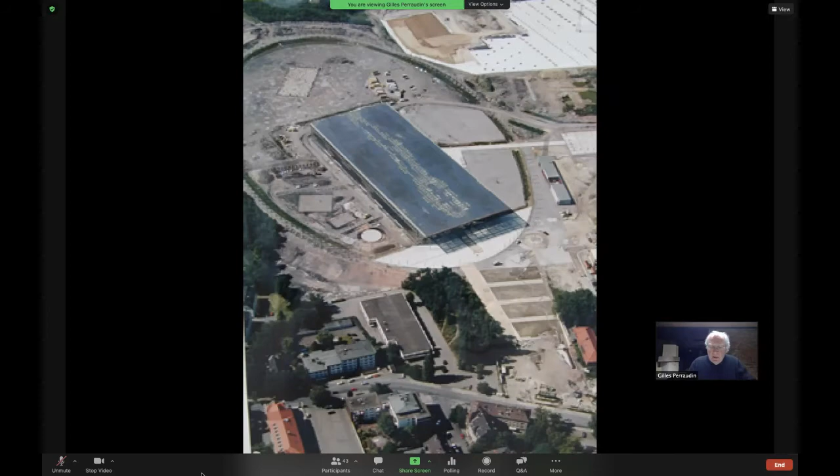In 1995, I started the construction of an important building in the Ruhr area of Germany, in the town of Herne. Coming from the first 15 years of my professional practice, it testifies to the culmination of research devoted to imagining architectures that respect the environment and best preserve our living conditions on Earth.

Built in wood from the nearby forest and covered by photovoltaic cells that produce electricity not only for itself but also for the newly built neighborhood, it has become a possible model of a response to the environmental challenges of the future.

Its double envelope constitutes the development of an architectural concept imagined from the start of my career, a concept that I call the microclimatic envelope, which consists of protecting the main spaces with a second envelope which protects them from climatic variations. Doubly protected, studies have shown a significant reduction in energy consumption, and it also provides generous convivial spaces.

This building of the Académie de Mont-Cenis, as I said, is not only fully self-sufficient, but it is also a producer of energy that benefits the new districts built around it.

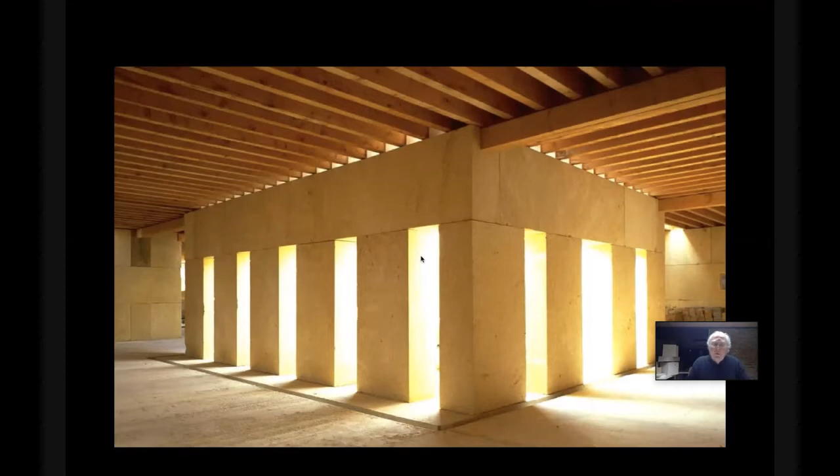The assembly of stone modules of 2 meters by 1 meter by half a meter, all identical and able to take only 2 positions, one vertical and one horizontal, excluding cantilevers, put me on the path of an architectural response of great sobriety. I then discovered a French literary movement called the Oulipo. This literary movement imposes very strict written rules, such as those used, for example, for poems or Japanese haiku. Imposed rules free the creator from his own psyche.

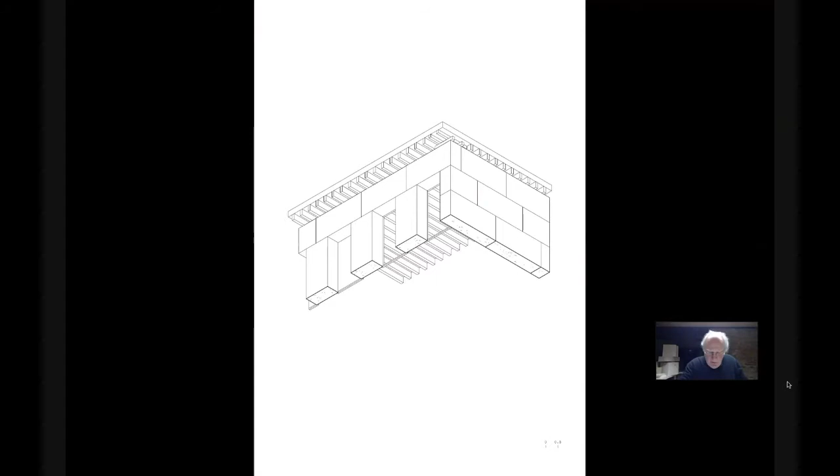Since the architectural form is imposed on me, I no longer have the anxiety of having to invent forms. This set me on the path of a discovery of fundamental qualities of architecture, which are rhythm, proportion, light, materials. Luckily, immediately after this crucial experience, I was commissioned to build a teaching college on the outskirts of Nîmes, a city founded by the Romans and close to the Pont du Gard quarries.

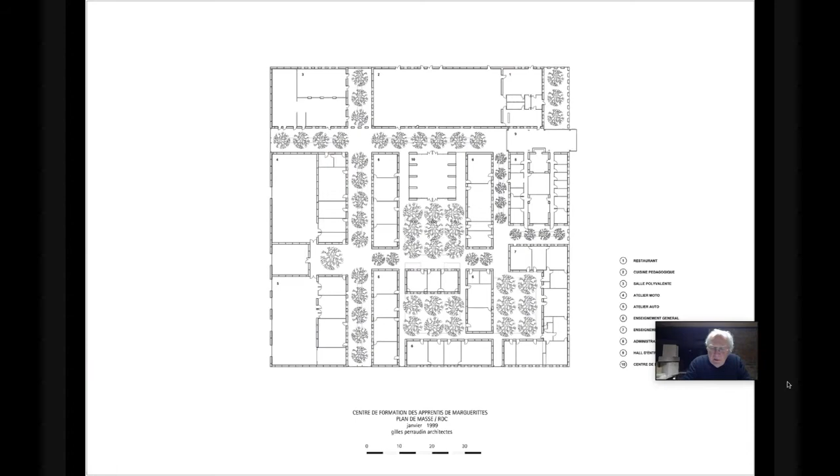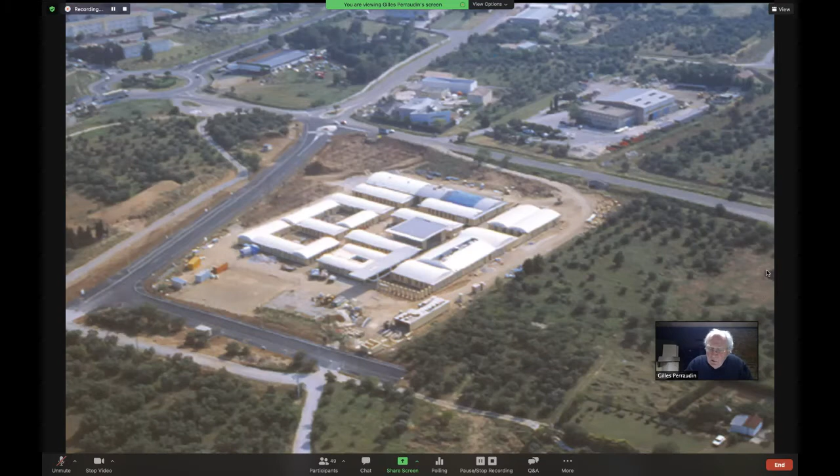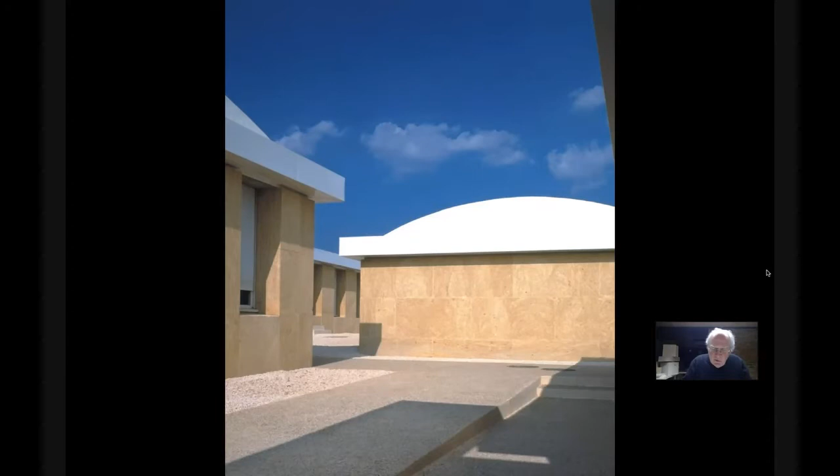Inspired by the construction of my winery, the project is a series of massive stone buildings with 50-centimeter-thick walls, single level, set in the middle of an old olive grove. The roof has a single span, vaulted to promote the effect of air stratification in a hot country. These constructions are arranged to break the north wind, the Mistral, and create courtyards and passages in the shade. This building is inspired by the Roman camps with cardo and decumanus, as much as a Chartreuse, which is a series of buildings assembled in a demarcated enclosure.

It was the opportunity to supplement my experience and my analysis on the interests and advantages of stone construction. First of all, it's speed. I always like to remember that this construction was ahead of the construction schedule for the first and the last time in my career. The assembly of stones, which can easily resemble prefabricated concrete blocks, is very quick. It is all the more so as the stone, once laid, gives an aspect of great beauty and avoids the additional cost of a coating on its surface.

These coatings, with limited constructive qualities, often lead architects to a purely aesthetic expression of their work. Numerous contemporary examples bear witness to this outrageous aestheticization of architecture. I believe that this aestheticization, challenging architects to invent every day a more spectacular work than the day before, has made architects simple producers of images to the detriment of their role as builders.

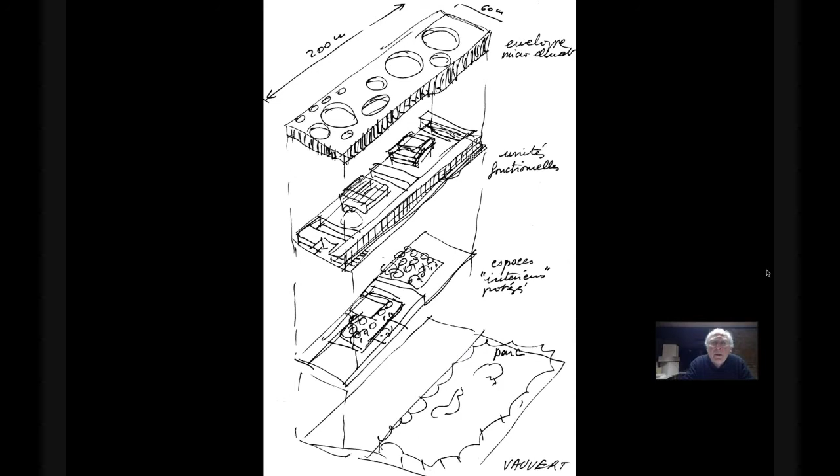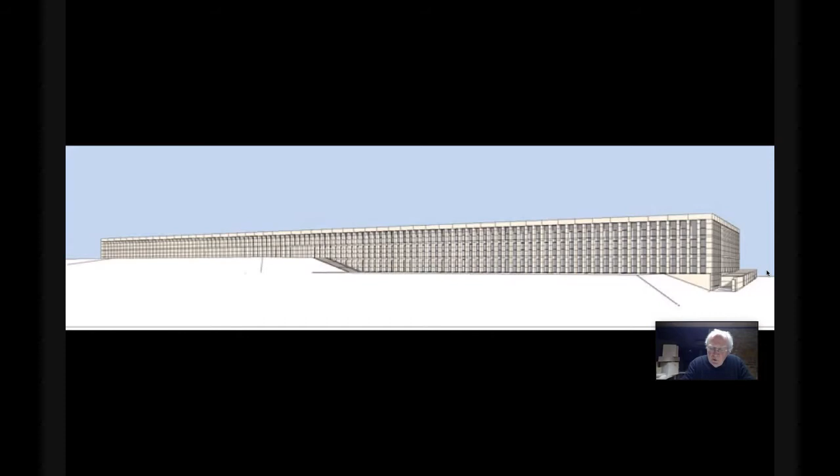The building, aligned along a new track, is a quadrangle 200 meters long and 60 meters wide. The various elements of the program are arranged by their use under a single roof pierced with openings defining the free spaces of the interior courtyard. Facing the plain that it dominates, the long facade defines a simple rhythm harmonized with the large openings of the roof. This project is a variation of the concept of a microclimatic envelope but adapted to southern Europe. The roof creates shade by controlling the sun and protecting intermediate spaces from the wind.

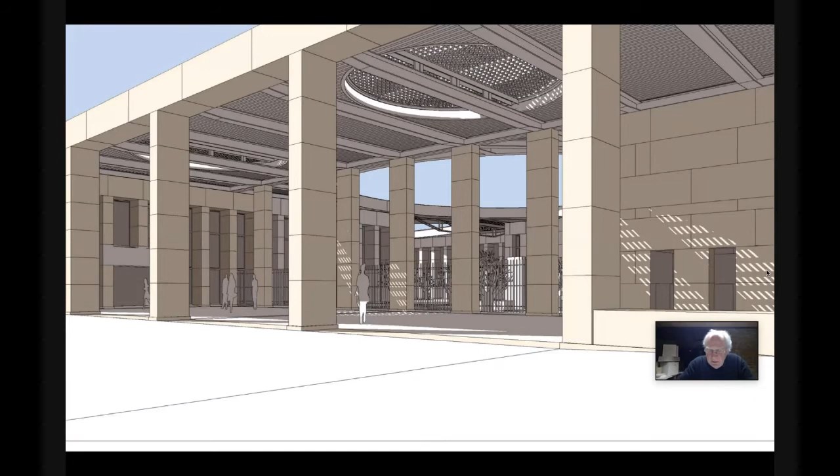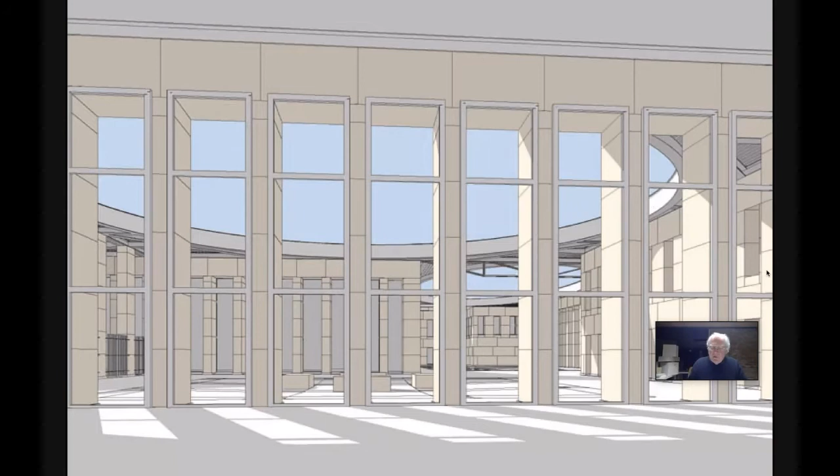But it was a disaster. While we had completed all the studies and the construction was ready to start, the client, under pressure from local politicians and traditional concrete companies, worked to prevent the realization. It is not easy to clash head-on with the existing economic system. If there is room for some marginal operations, the system will do everything to prevent a challenge to its hegemony. So far, no operation of this magnitude has seen the light of day.

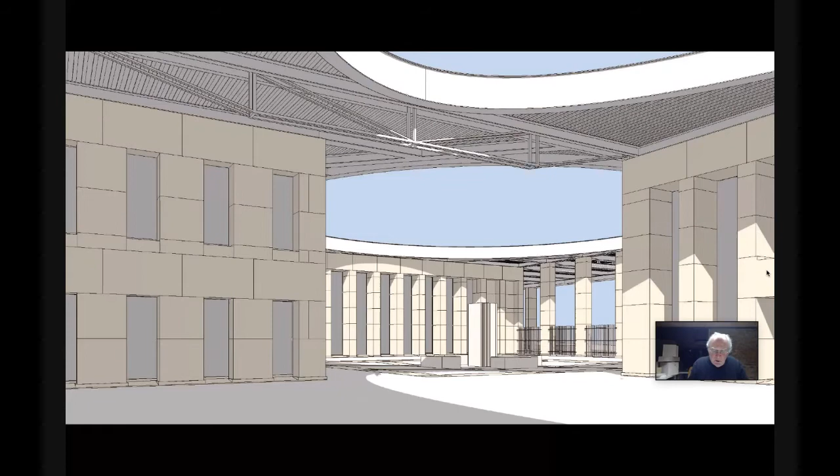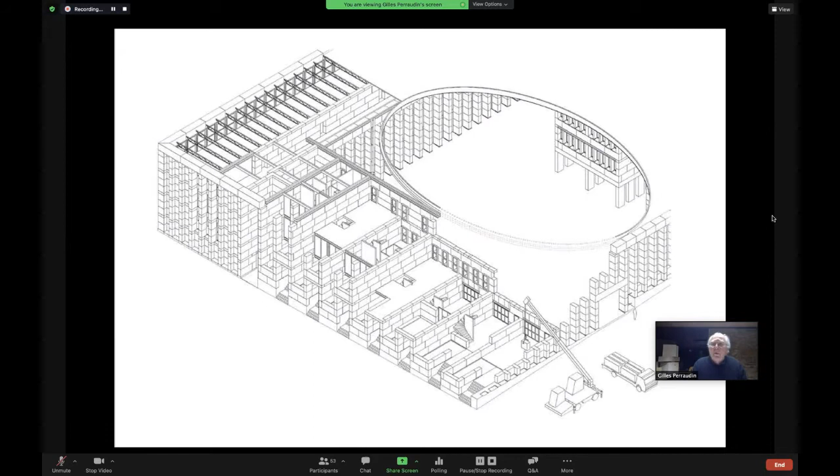This hegemony is expressed in different ways, in particular at the level of building standards and regulations. These rules discriminate against constructions that offer solutions based on natural materials, also in terms of seismic rules or fire. I remember we discussed it with Aminta in London recently. It is the industrial firms that finance the regulations. The stone industry is poor. It is not able to lay down construction rules following research processes imposed by the firms themselves. Thus stone, which has for it the advantage of a few millennia of construction, has no standard adapted to the contemporary world of construction.

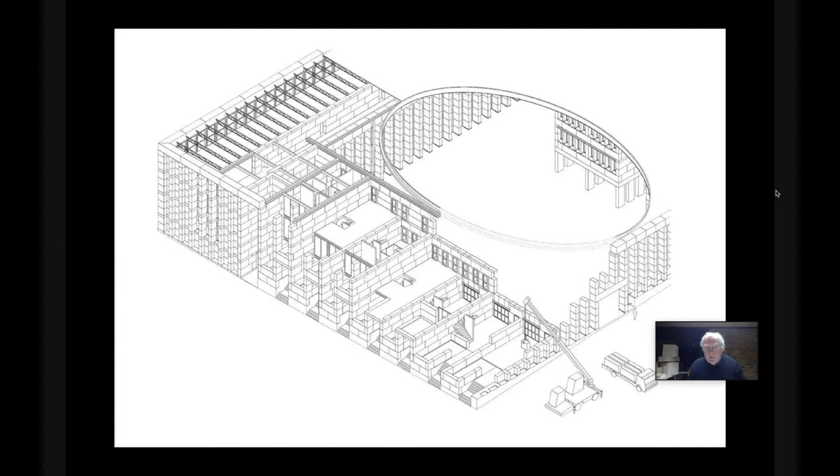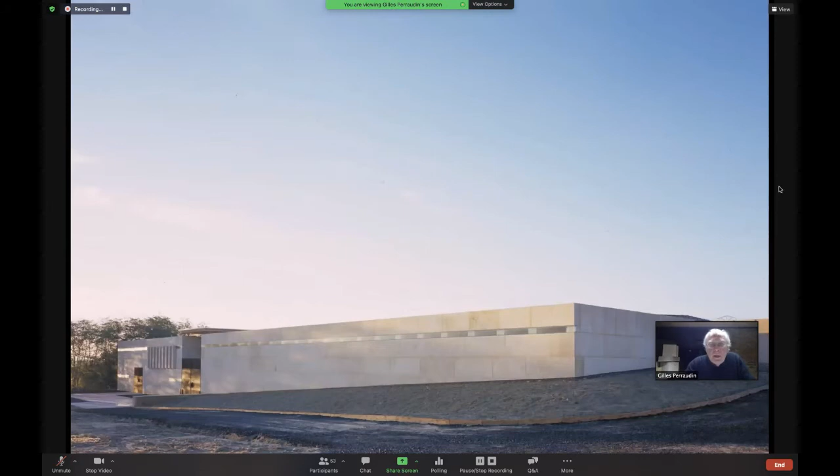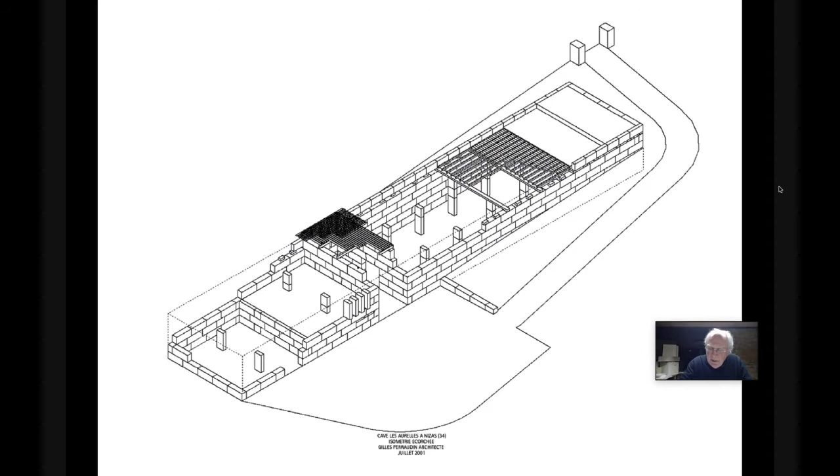We will see in a recent project that we have succeeded in countering these standards, and for decades we have been fighting the perverse effects they have on stone construction. This project was a massive blow with disastrous consequences for my professional future. That's why I was happy to welcome a small wine cellar project. The client wanted to build a massive stone part to hide a large metal shed. We convinced him to do the whole thing in stone. That's what we did, with the same budget as a metal shed and with infinitely more quality.

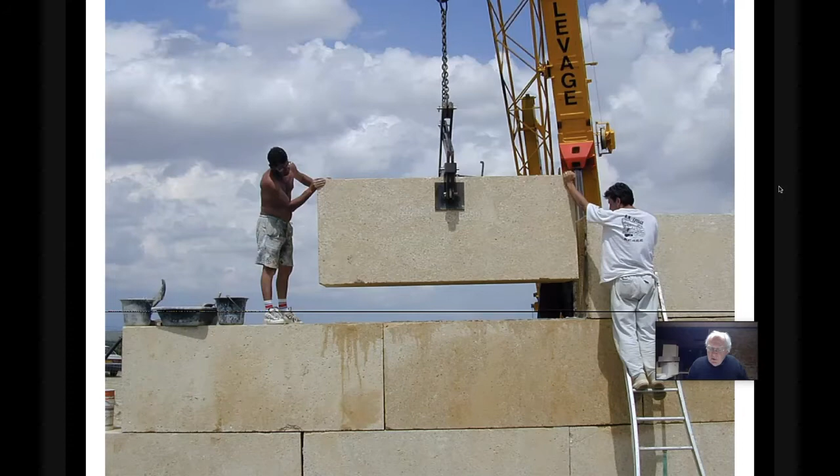With 65 centimeter thick walls and a planted roof, thermal inertia is ideal. It's a cellar and it's ideal for the wine. You have to understand the construction process, which is very economical. The quarryman extracts stone blocks adapted to the tools they have. These blocks are simply cut in half by large saws, then they are mounted quickly by traditional lifting devices. Simply laid with a lime mortar joint to ensure air and water tightness, the construction is a simple operation. No steel or concrete reinforcement.

As expressed before, the construction imposes a sober writing. A wine cellar is like a chapel, especially in France, with a central nave and side aisles, as you can see in the picture. The light proportions result from the frugality of the construction. The consequences of the use of stone on my architectural style will become more and more significant. The construction of a new wine cellar would provide me the opportunity. The circumstances of this project would allow us to reach an increasingly mystical dimension of architectural approach.

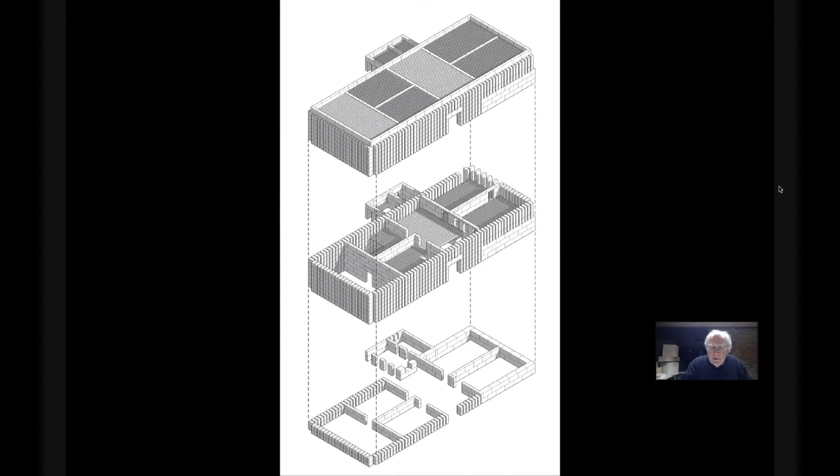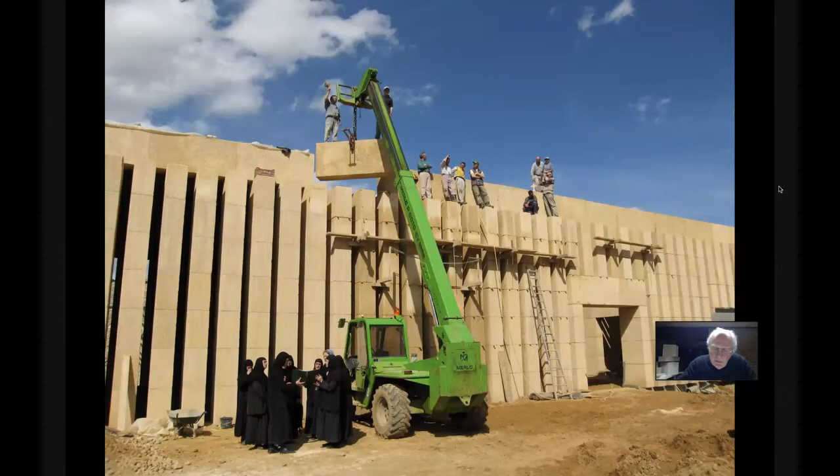A religious community of Orthodox nuns living in the south of France from vineyards came to see me for the construction of their new winery adjoining the renovated farm in which they lived. Followers of agroecology and guided by Pierre Rabhi, a famous French peasant philosopher, they embodied a radical attitude for the societal future of a world altered by unbridled consumerism. With few resources, we decided to build in self-construction.

I must tell you my admiration for traditional vernacular architecture. These architectures are for me the example of the splendor of architecture subject to strict rules of economy of means. Men built for their bare need without speculating on the market value of their property.

Without preparation and without makeup, these frugal constructions of great sobriety of expression are sensual splendors. I ended up concluding that beauty can only be born under the most extreme economic conditions. This building I show you now is a double square in plan. Didn't Louis Kahn start all his projects by drawing a square?

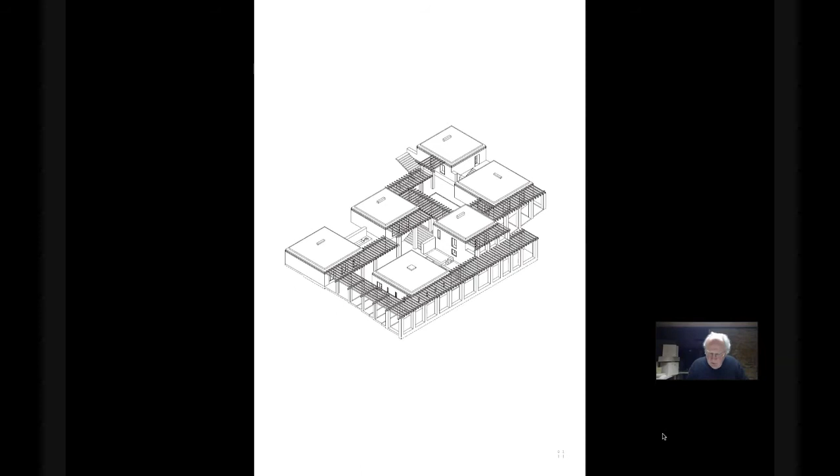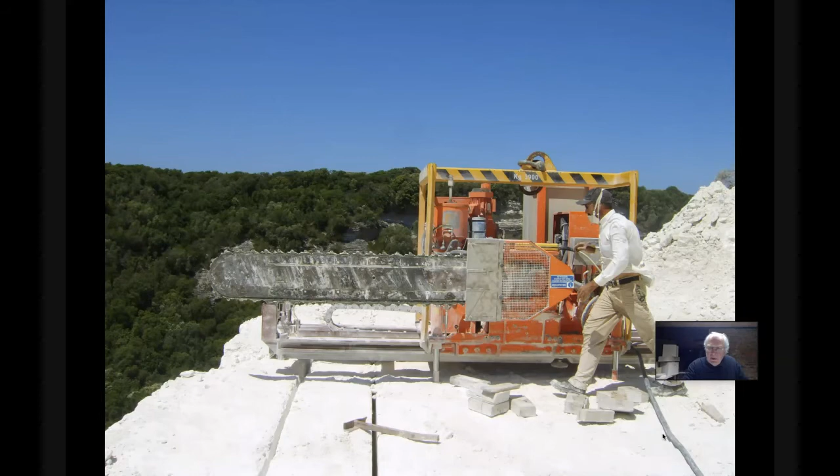I have brought together in a book, Building in Massive Stone Today, all the operations involved in the construction of the Patrimonio Wine Museum. I think that you can find it in a good library. It's Building in Massive Stone Today. The walls are 60 centimeters thick.

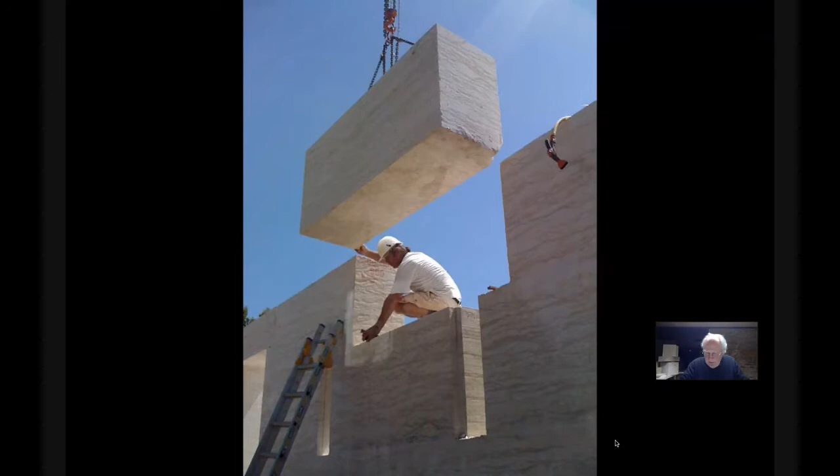The roof is in wood, Corsican, we call it Laricio pine, it's a Corsican pine, insulated with wool, and covered with earth. The joinery is made of chestnut trees, endemic to the island. No thermal insulation on the walls to preserve the advantage of the high inertia of the stone.

The outdoor spaces equipped with vegetated pergolas and ponds produce a protective microclimate. These are the traditional devices of Mediterranean architecture. We have the feeling of walking in a place that seems to come from 1,000 or 2,000 years past, but yet very contemporary. A place, however, indifferent to modernity.

Stone is already made in the billions of years of the creation of the planet. Extracted simply by sawing, the stones are then cut, transported by trucks, numbered according to a precise layout. The stones are mounted quickly with a small mobile construction machine. In the end, the stone has an extremely low carbon footprint, in the order of 4 kilos per ton.

At the start of the studies, we had to build earthen buildings. There are some earthen constructions built in Corsica. They were inspired by Hassan Fathy, who came to give a seminar in Corsica at the request of some fanatics of his work. We must pay homage here to the great Egyptian master because he illustrates the courage and conviction of an architect who knew how to fight modernity, to reconnect with the millennium and reconnect people with their identity.

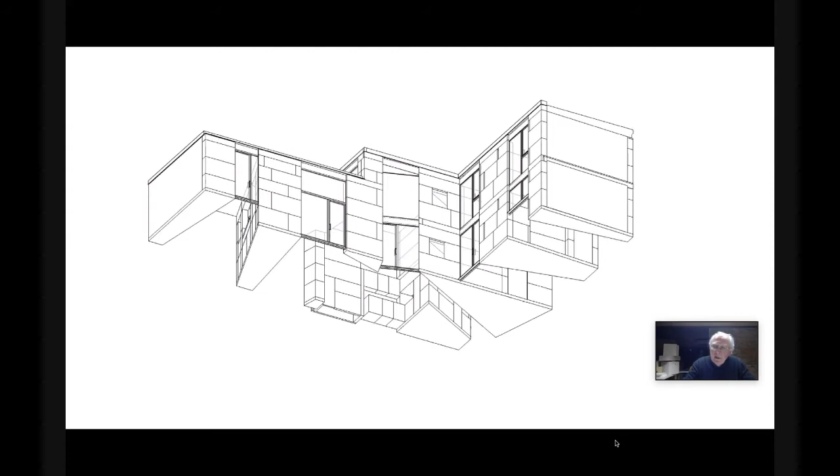This house project, in a very dense urban context, will give us the opportunity to prove that stone is a material adapted to the most complex conditions. The small plot we had is completely enclosed in the middle of other buildings in the historic district of Lyon. The project makes the most of the regulatory possibilities for construction. Heights and widths are strictly regulated.

A single opening gives us access to the construction site. To overcome the shallow construction depth, the serving spaces, bathroom, laundry room, pantry, and so on, are perpendicular to the facades. In the voids resulting from their position are the living spaces.

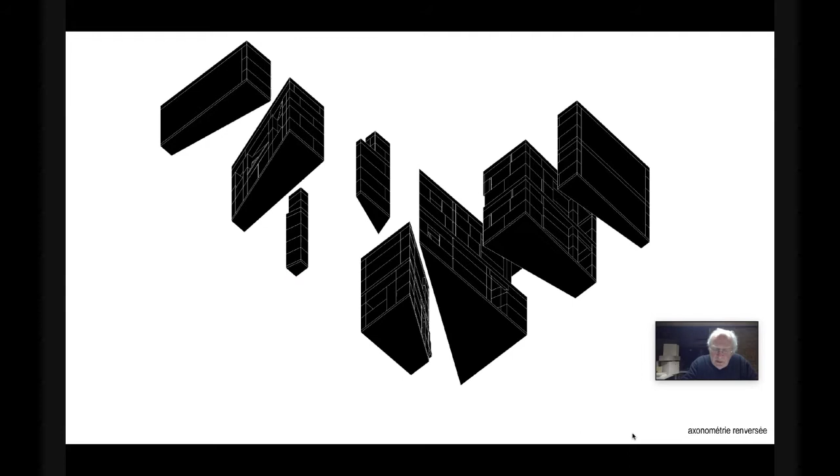Yes, you can see in the picture, these are the supports which contain the serving spaces. The serving blocks become the supports to the floor and the roof. We enter them, cross them, and the house becomes a walk in a stone landscape. A skillful and complex assemblage of stone.

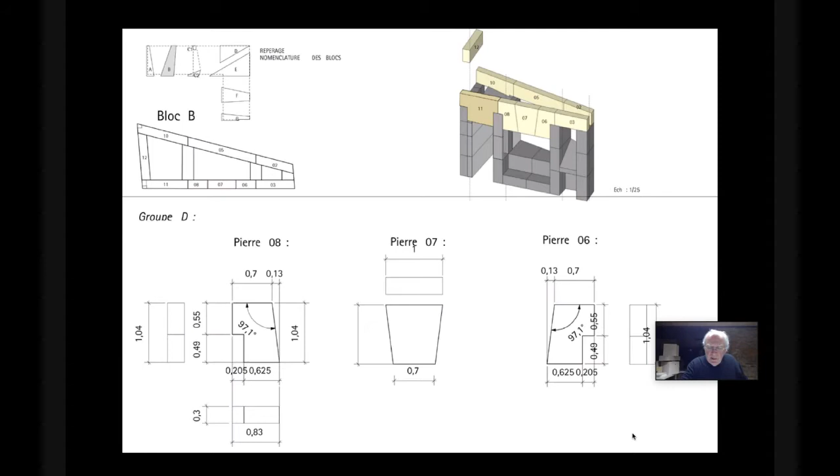Yes, a feeling of being in a medieval construction. It is a tribute to Louis Kahn, who was inspired by medieval construction in his work. The work required to define each stone is long but exciting. You can see it in this example, in this picture.

But this work has another virtue, that of redefining the relationship between architecture and engineering. Often architects leave it to engineers to define the construction of their work, which ends up escaping them. Faced with this disposition, the architects take refuge in a purely plastic work which distorts their art. No need for an engineer to define the structure. The simple laws of stability are sufficient to guarantee the work. The architect once again becomes the master of his work.

The art of architecture is the most difficult of arts. It is located on the borders of sculpture, painting, music, and subject to the laws of construction. But the art cannot be confused with any of the other artistic disciplines. It is a demanding discipline to be able to combine the satisfaction of basic needs in an artistic response. Few are those who succeed, and we can see how the architecture of the 20th century, depriving architects of the technical mastery of their discipline, locked them in a plastic or sculptural approach that will suffocate them. The stone can help save us.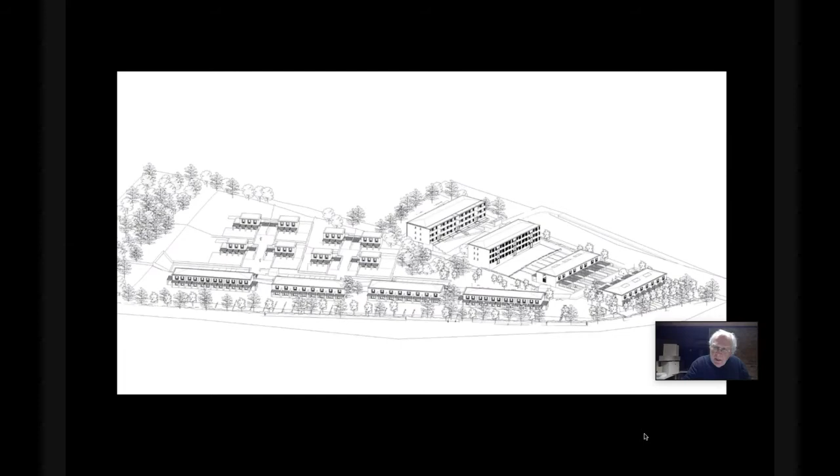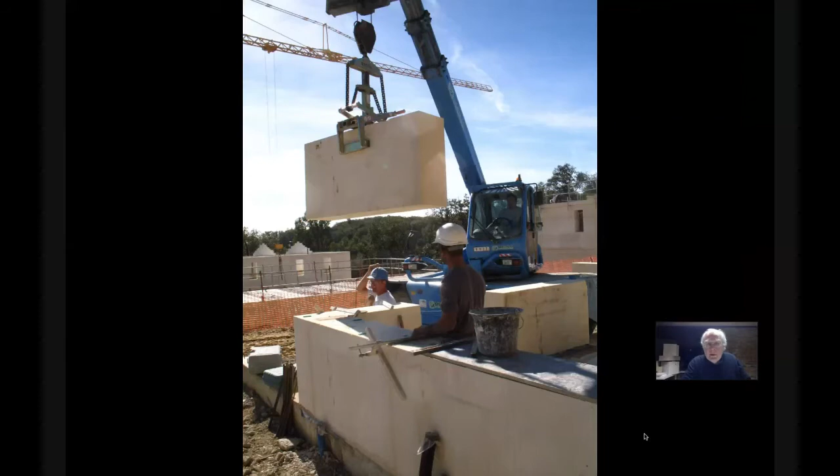All walls are 30 centimeters thick stone with no concrete or steel reinforcement. The joinery is made of larch, a wood that does not need chemical protective treatment. With the stone, which has no chemical treatment, the housing is very healthy. The accommodations are systematically crossing between north and south. To the south, a large terrace extends the interior space. Wooden shutters transform it into a protective space on summer days and winter nights. Stone provides a great deal of inertia, which cools homes in summer and retains heat in winter. The building is very compact, for a minimum of walls in contact with the outside.

The regulations require us to install insulation. Congratulations to the insulation manufacturers' lobby. The construction required more than 1,000 cubic meters of stone, yes. Only a few quarries in France are capable of meeting this challenge. The development of stone projects will allow the development of quarries to meet new demand. Let's not forget that after World War II, the reconstruction of France was done in stone, illustrated by the gigantic operation of the architect Fernand Pouillon in Marseille, Paris, and Algiers.

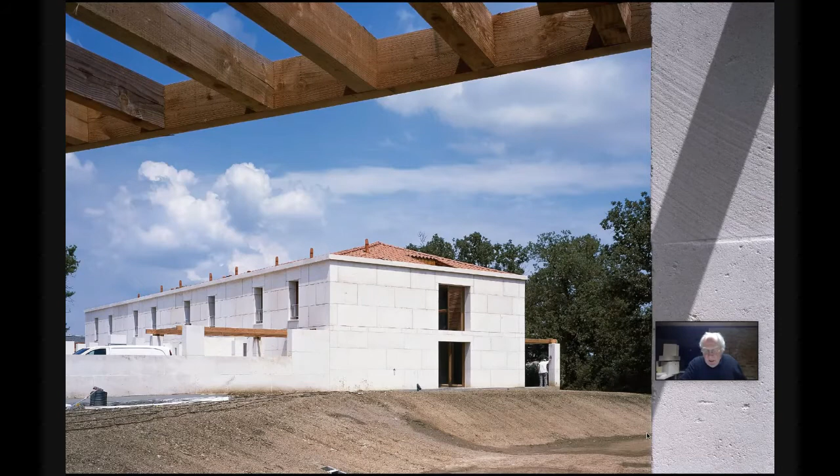Some environmentalists worry about the development of quarries which deplete resources. They may be reassured. Each construction is a new quarry. There are many historical examples of buildings that were dismantled and then reused. The stone cladding of the pyramids of Giza was used to build the palaces of Cairo. The dismantling of the Bastille during the French Revolution is reflected in the buildings of the district. And the architect reused Roman columns for the construction of St. Peter's Square. Stone is not recyclable, it is reused.

Recycling requires spending new energy. For example, aluminium requires as much energy for recycling as it does for manufacturing. For this reason, recycling, which is the good conscience of the industry, should be banned. The stone is indefinitely reusable because no energy is required for its reuse. You can change small pieces of degraded stone, which is impossible with reinforced concrete because the built skeleton is integral from the top to the bottom of the building.

Thanks to the large size of the elements, the assembly time is very fast and therefore very economical. We have adapted this size to contemporary lifting devices. We still have to make progress to find lifting means powered by renewable energies.

I would like to point out to you the construction of a contemporary building that does not use any fossil fuel, never for materials, nor for lifting equipment. It is an experiment, I have no picture, I'm sorry, carried out by archaeologists who decided to remake the castle of Guédelon in Burgundy, in France, in the style of construction of the time. This experience proves that we can build today without spending carbon.

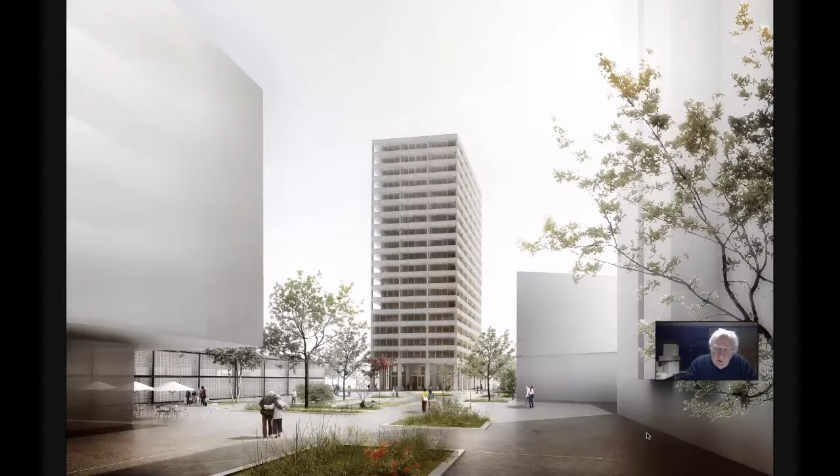This whole operation does not go beyond 3 levels. Would stone construction be limited in height, I was told? The following project will show us that we can make high-rise buildings in stone. The first, unfortunately not built, demonstration is that of a tower presented during a competition in the city of Geneva, made up of a superposition of shops, offices, and housing of 20 levels. The building is entirely in stone, a granite called gneiss, and climbs 65 meters in height. The inner bracing core is concrete.

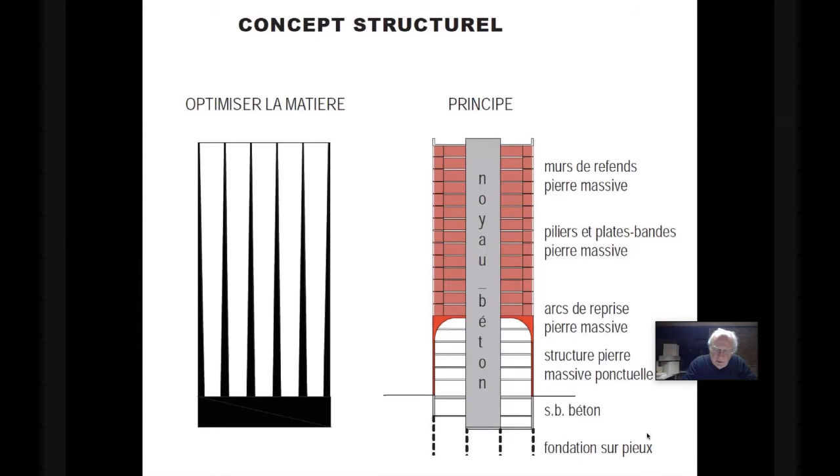Faced with the doubt that a listener of my conference expressed on the possibility that such a building could be built in Paris, I pointed out to him the already proven presence of 2 towers 65 meters high, at Notre-Dame de Paris. The two towers of Notre-Dame de Paris are 65 meters high. And I am sure London has monuments of this height.

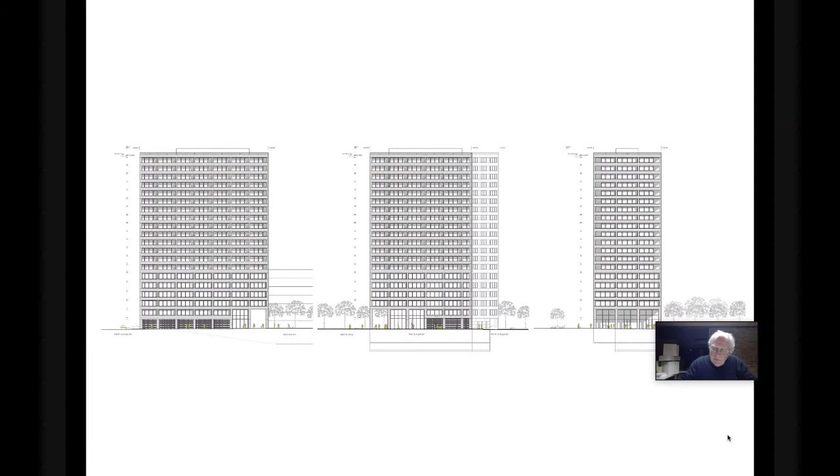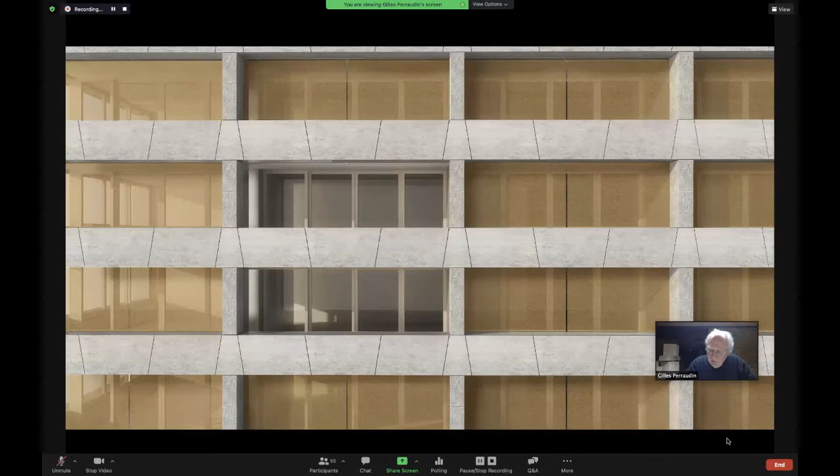One day, traveling in the south of England with Rice, he pointed out to me that it would be difficult to justify the stability of the church we were visiting for the lack of a suitable mathematical model. It was Peter who first put the idea of stone in my head and made it possible. He knew that the absence of rules would be a barrier to the use of stone. We need to motivate young engineers to rediscover these splendid materials.

But before showing you two projects of buildings of modest heights, I would like to bring up a subject that is close to my heart, the thermal insulation, and I will do it with a modest little house. It is a small single-family house built in the south of France, in the Rhone Valley. It is located in a residential area and on a small floodplain almost 1 story high. To find the best ratio between volume and living space, the house is on a square basis, always the square. Obeying strict geometric rules, division into 9 equal parts, the living spaces are distributed in an optimized manner.

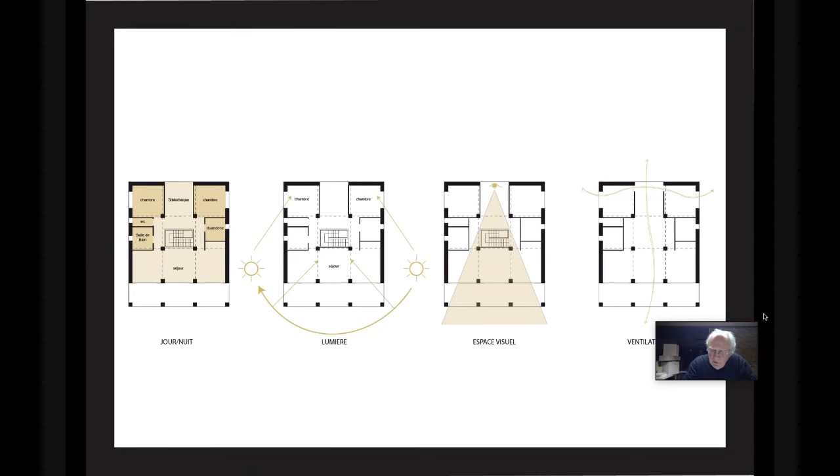With a large terrace to the south, in front of a large bay, capturing the generous winter sun and protected in summer by a vegetated pergola, the living room crosses the house to benefit from a bay to the north for full ventilation. 2 bedrooms and the services area occupy the east and west faces. The rooms are fitted with stone screens, which allow ventilation, protection from the sun and intrusion. These are the kind of drawings we did to manage the construction on site. Each stone is defined, and on the site it's only an assembly.

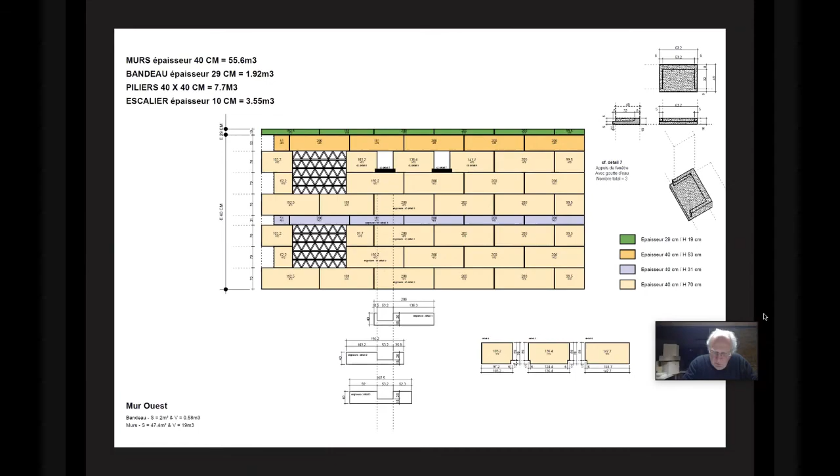Our architectural work focuses on eliminating all unnecessary formalism. It focuses only on the subjects of light, as I said before, proportion, rhythm, and matter. Matter, what do you want to be? The stone answers, I want to be a wall. These walls are 40 centimeters thick and have no insulation. The design of the house allows for this regulatory deviation. The rooms are not heated.

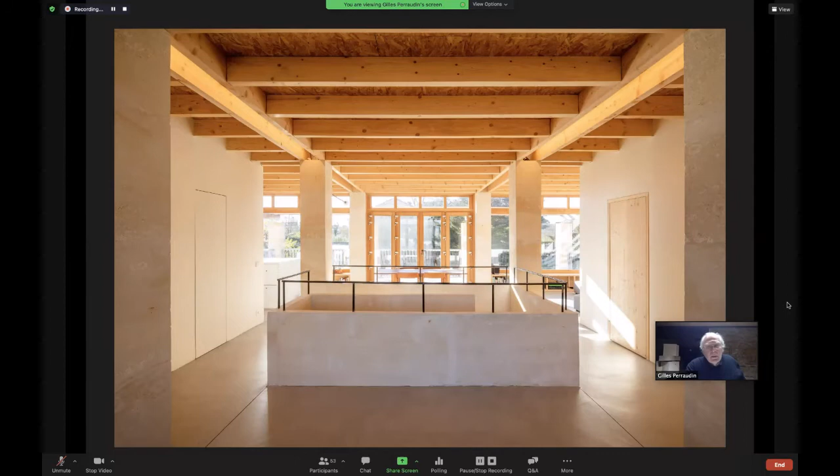The large north and south windows have double glazing, and the east and west walls are protected by the services areas. The insulation surface is very small. Only the roof and floors are insulated. In the context of global warming, summer comfort is more important than winter comfort. This is a picture of this very small house on a very low budget, made entirely in stone and wood. Thermal inertia must be privileged, and stone meets this objective perfectly.

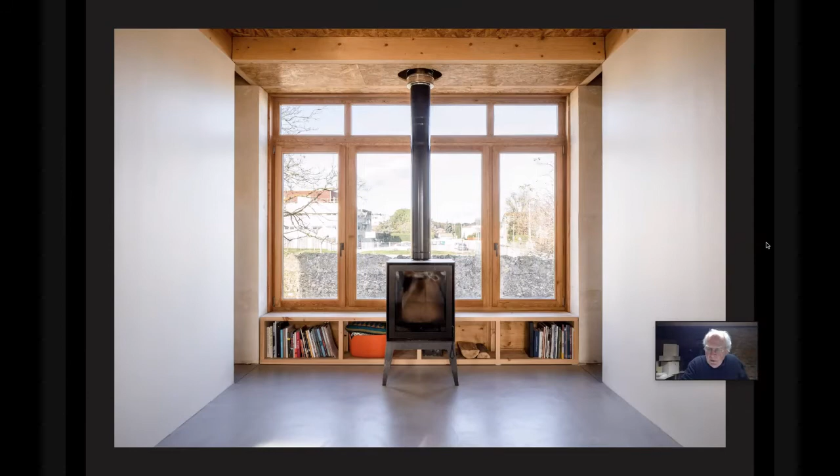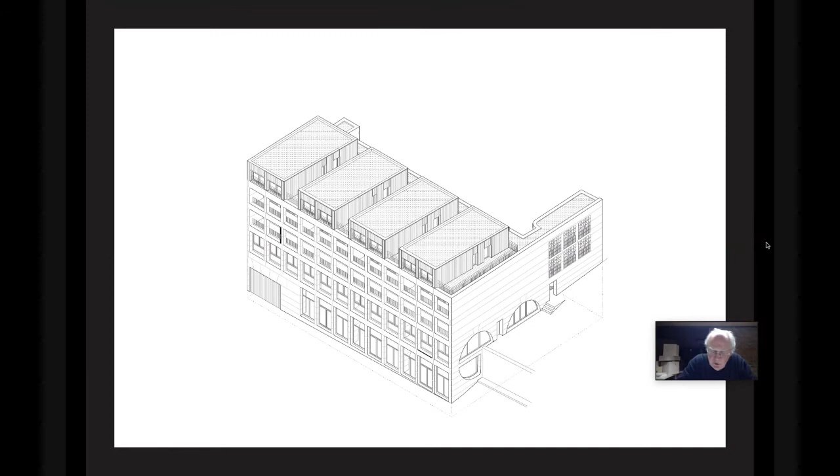I will end my presentation with 2 projects under construction. The first is in Lyon. The second is in Geneva, in Switzerland. Located on the banks of the Rhone in Lyon, opposite the large urban park of the Tête d'Or, the program called for the superimposition of functions, a return to principles of the city before the new towns which separate these functions in space.

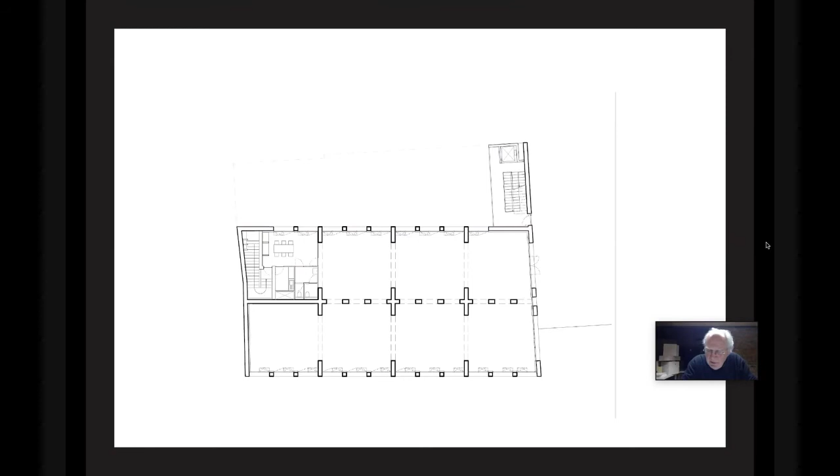A workshop on the ground floor, a carpentry fab lab, on the first level the offices, and finally 3 levels of accommodation, 2 of which are duplex on the roof. It is a modest project, but one that focuses a lot of response on the future of cities. If we want to reduce our carbon footprint, it is imperative to reduce urban travel by bringing home and the workplace closer together.

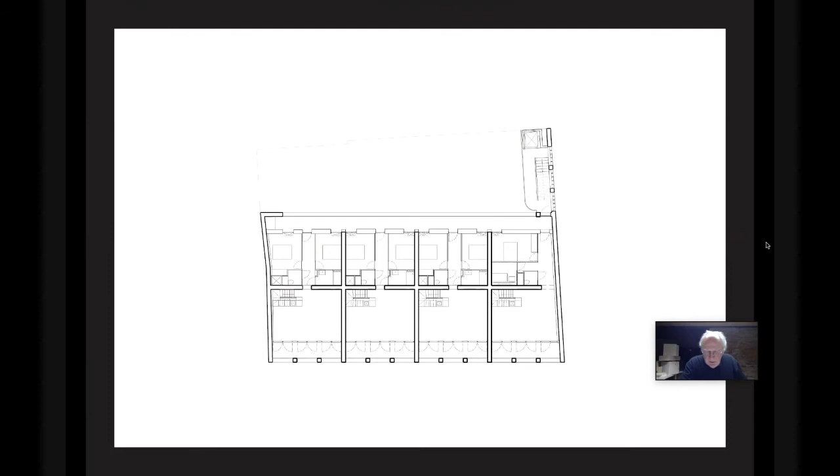A few years ago, I worked on a city project built in stone and including this reflection on urban diversity, as well as on hyper-density to reduce the impact of urban sprawl. In a few centuries, if we are still alive, the endless lines of cars going from places of residence to places of work will make people laugh. They are so ridiculous.

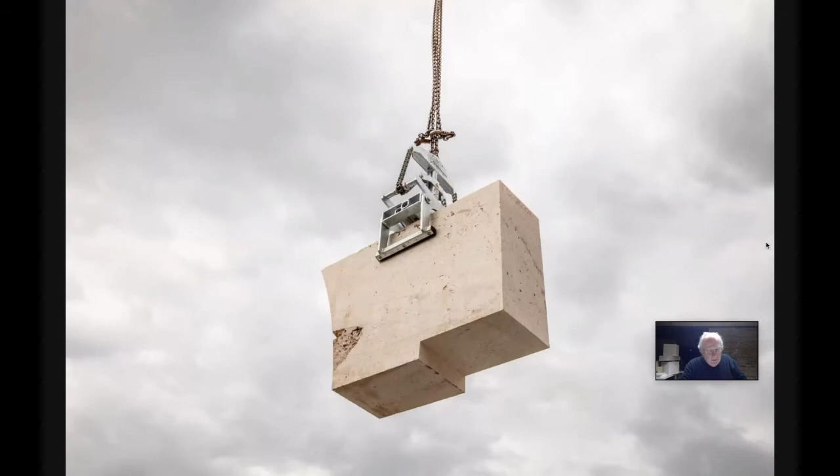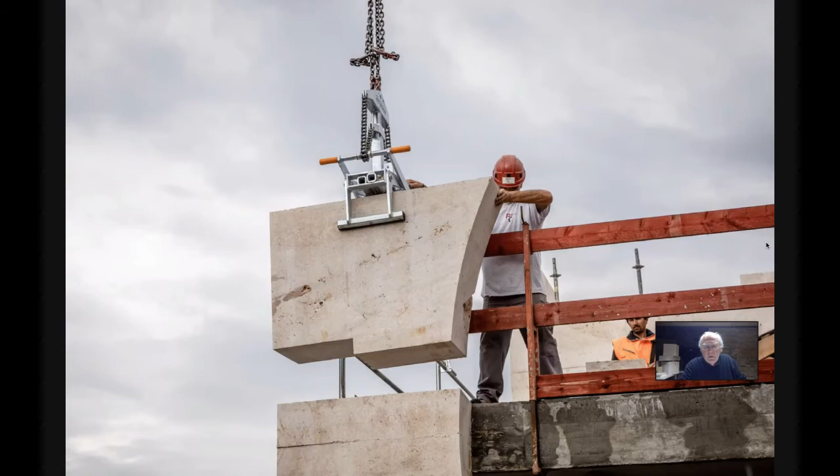This is a picture of the montage of the stone for this project. As you can see, each stone is cut in precise dimensions, and then they are put with a simple glue mortar. As you can see, there is no mechanical system to maintain the stones between them.

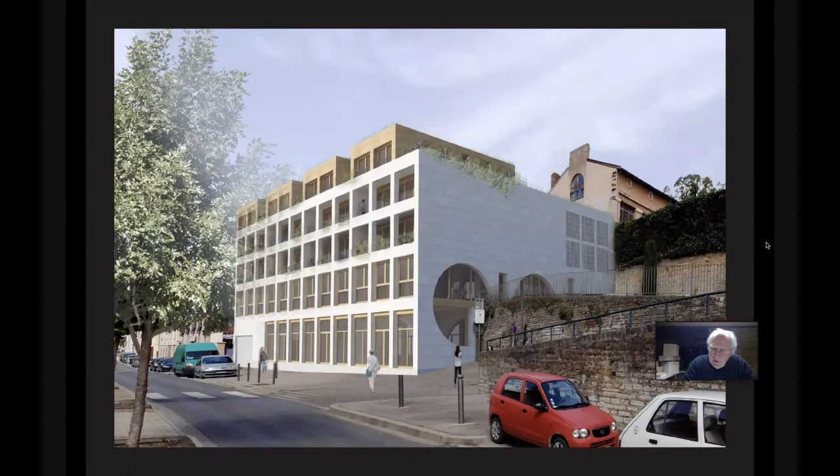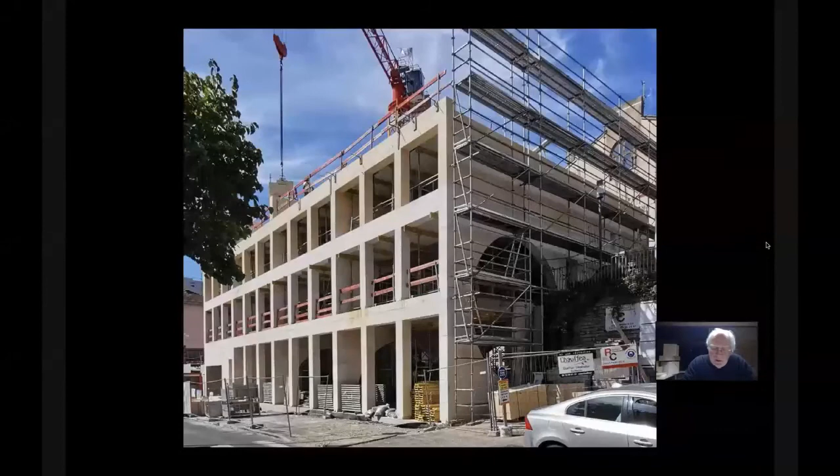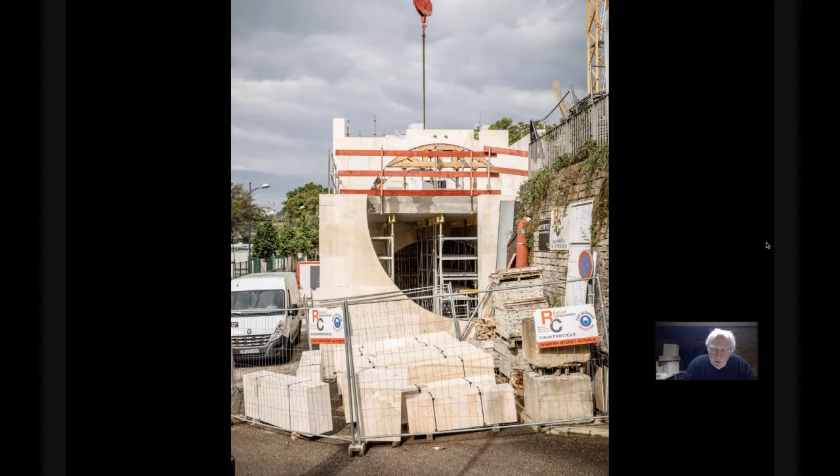The facade responds to a rhythm guided by the maximum crossing with a single stone, which is 2.5 meters. The need to cross large spaces on the ground floor imposes the most classic form of crossing on Earth. People are amazed at how fast and efficient it is. If we consider a process that includes ore extraction, transportation, blast furnace processing, rolling, cutting, welding, and transportation, one will be astounded by the extremely short making time of a stone arch.

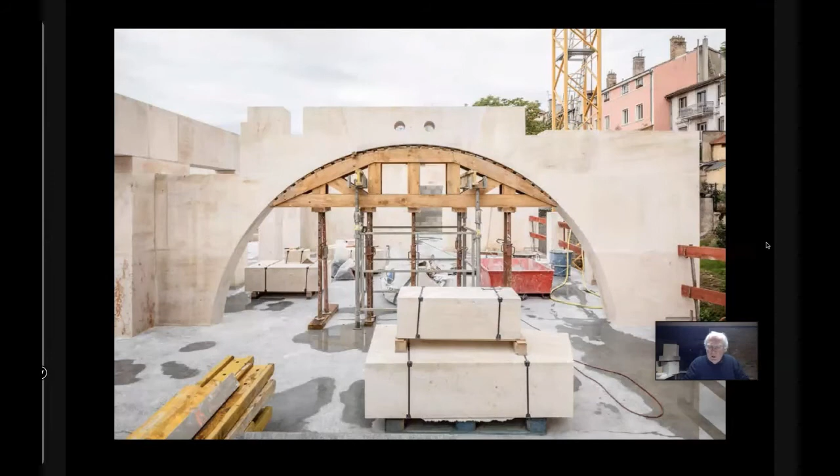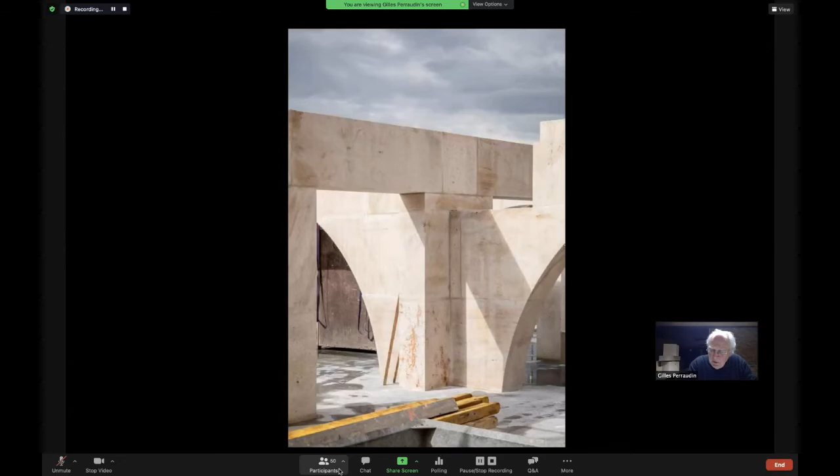And what about carbon footprint? Our Lyon office served as a model for this. Lyon is built on hills, and one of them, the Croix-Rousse, was covered in the 19th century with workshops to house the silk weavers, who were one of the city's great specialties. These workshops are superimposed in high-rise buildings, sometimes up to 35 meters high, constructed soberly. They are all of the same model: a load-bearing frame in massive stone every 2.5 meters, as I said, served by an open exterior passageway crossing between the streets and the interior courtyard.

Summer is hot in Lyon, and ventilation from the green interior courtyards is essential. The inertia of stone, like that of wooden floors loaded with sand, is essential. Certainly, we must transport the stone. With the disappearance of the railways, the road took over. Why? One of the reasons is that the time between production and consumption should be as short as possible for better performance on financial flows. The road allows it. But this law of the productivist system is only valid if the transported products have high added value, that is to say, industrial products. But stone is a natural product with low added value. It could be transported by river or rail. These transports are less and less developed and condemn us to use the road.

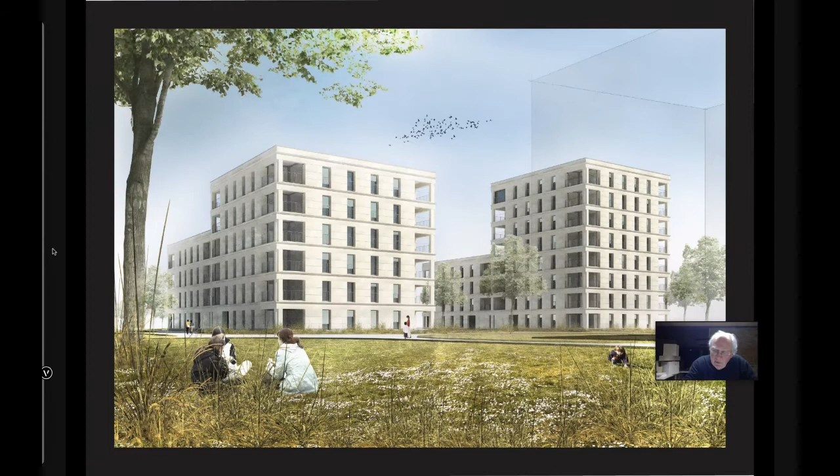This is the last project I did, which is under construction now in Geneva, in Switzerland. Faced with a housing shortage, the canton of Geneva has, for several years, initiated an ambitious housing construction policy. This project takes place in a complex of around 700 housing units in the town of Plan-les-Ouates on the outskirts of Geneva. Awarded after an architectural competition, our proposal concerned 4 buildings grouped in pairs of 5 to 8 levels. A square plan is imposed for each building. No need to invoke Louis Kahn. The Swiss are rigorous people, and the formal sobriety of their construction satisfies us.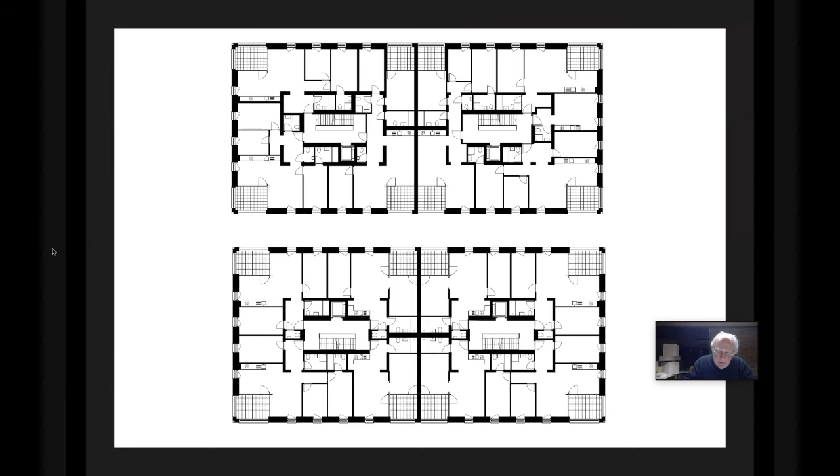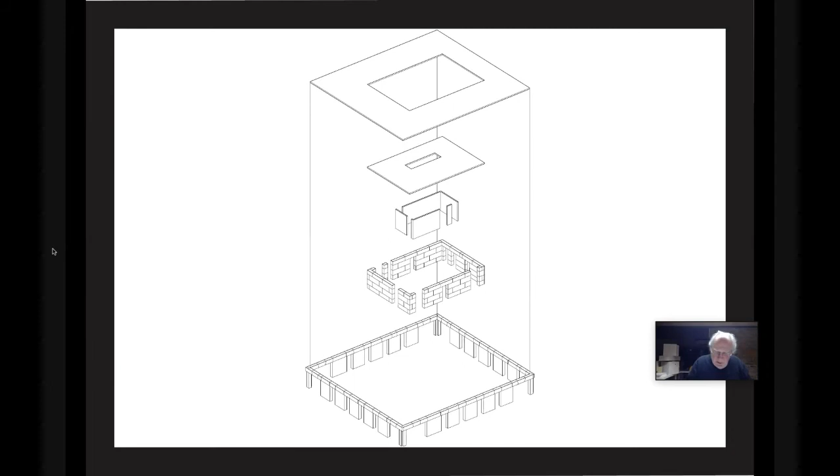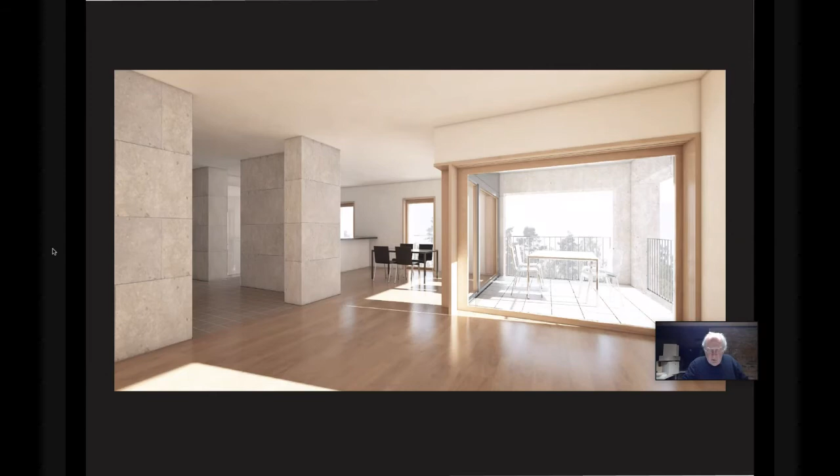On this square base, we project 3 nested rings. In the center, the vertical distribution. Then a second ring delimiting the service areas. And finally, the last crown of the living spaces: kitchen, living room, bedrooms. Between each crown are massive stone walls, and each wall meets different requirements. 2 are interior, and the third constitutes the facade. The interior wall is the least loaded. It is made of a thinner stone and does not require frost resistance.

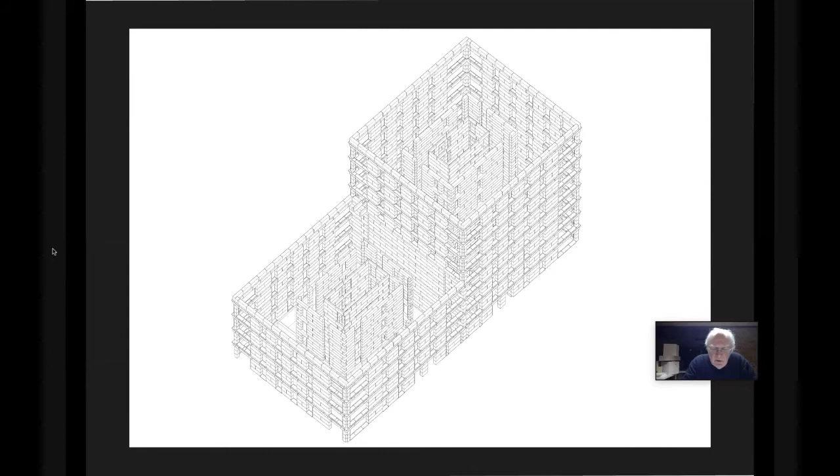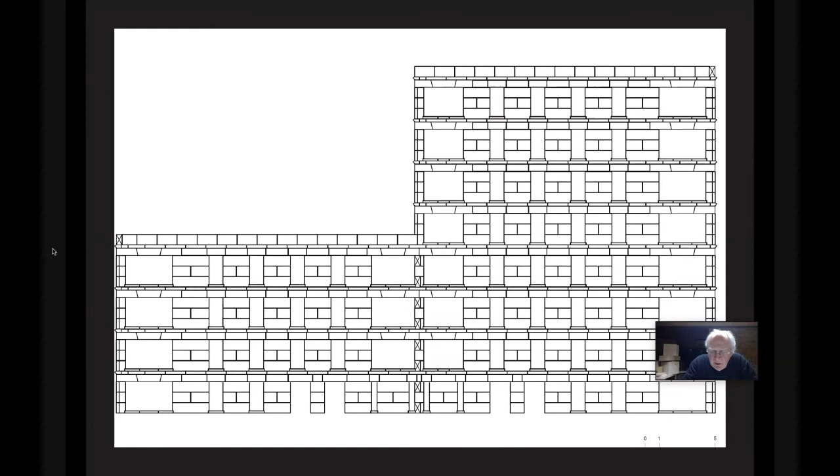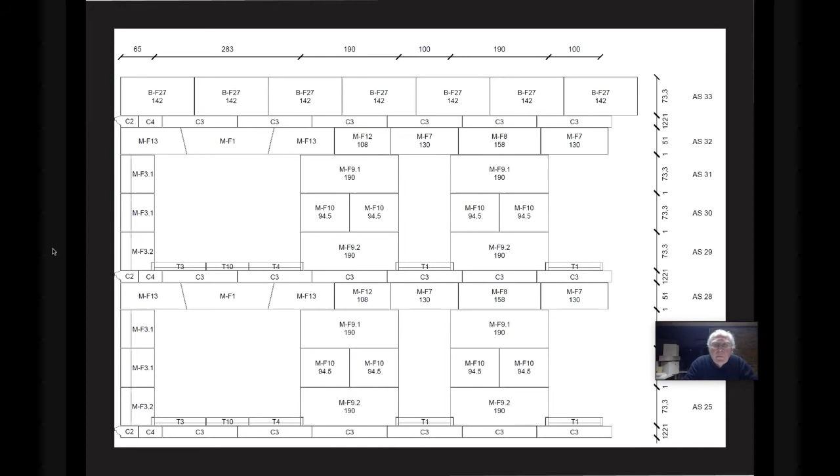In these drawings, you can see the 7,000 blocks we need to build these 2 buildings. The double load intermediate wall is made of a more stress-resistant stone with an average thickness of 40 centimeters. The walls of the first 2 levels, which support the 8 levels, are thicker, 50 centimeters. The front wall, which is not the most heavily loaded, must meet the criteria of resistance to frost, and in the lower parts to possible degradation from shocks and aggression from the splashing of rain. Cornices prevent water from flowing and staining the walls due to urban pollution.

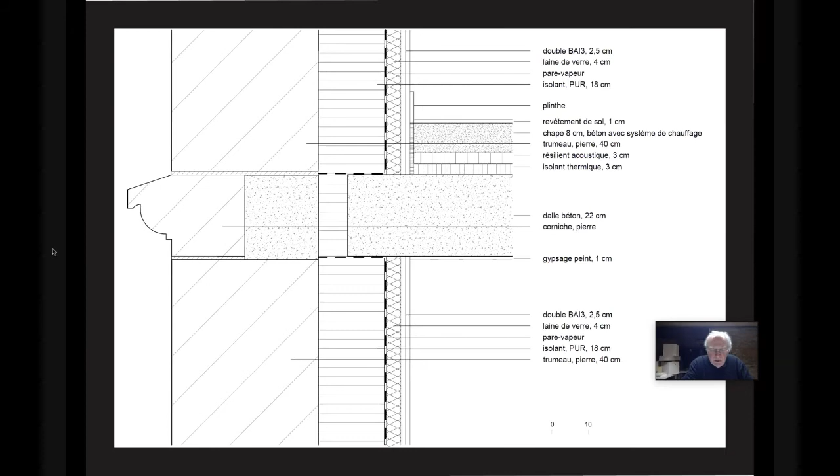The massive load-bearing stone construction without structural reinforcement changed the division of labor between architects and engineers. The architect once again becomes the master of the work. He draws the works to be built. The layout allows him to master all the elements built.

For this project, as I said before, 7,000 stones were necessary. For the last project, I would like to talk to you about an important notion. This is the embodied energy in construction. This energy corresponds to the sum of the energies necessary for the manufacture of materials and their implementation on the site.

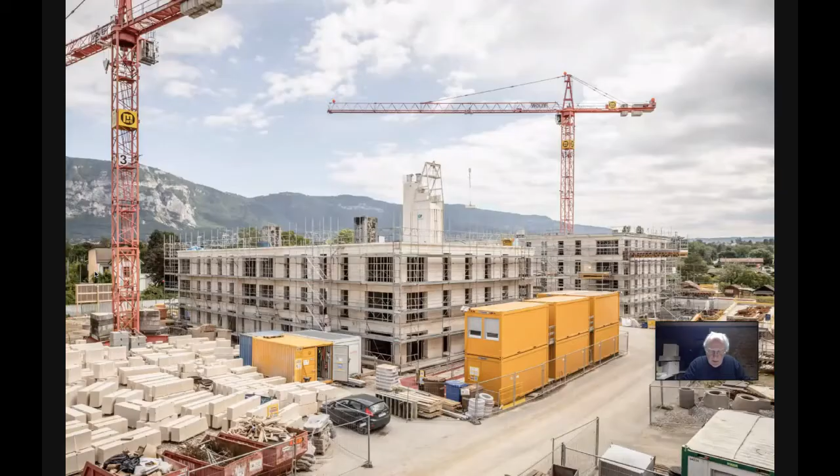Today, we prioritize the energy consumed for comfort, but recent research has shown that embodied energy is more important than maintenance energy. I would like to point out to you a research carried out within the framework of the ETH in Zurich. It is a great school in Zurich. This study demonstrates, taking as an example the important operation carried out

by Fernand Pouillon in 1960 in Meudon, near Paris, that the embodied energy is more important than all the solutions that we adopt today to reduce low-cost housing energy consumption. Technical solutions, such as wall insulation, double glazing, reinforced joinery, double flow ventilation, etc.

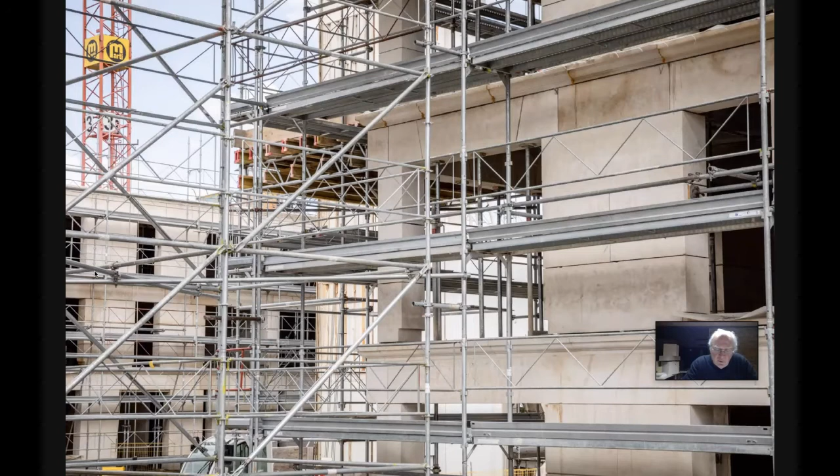Fernand Pouillon's construction is in massive stone, coming from the south of France, the Fontvieille quarries near Arles, and transported by train to Paris. You can find this research on the internet. It is available on the internet.

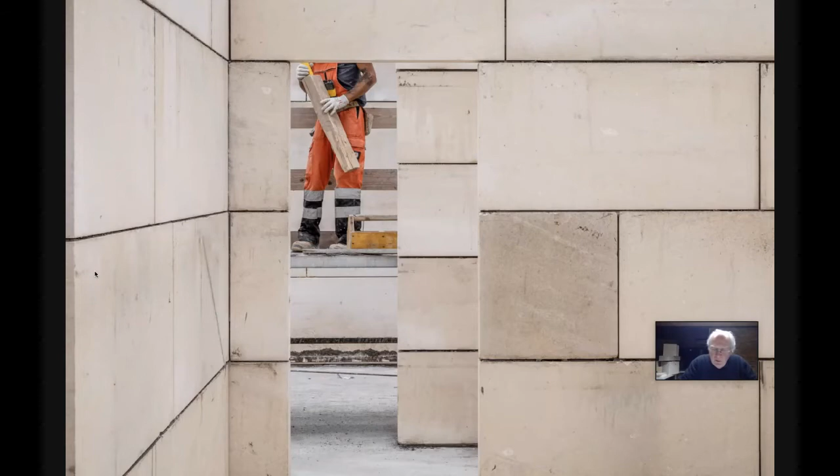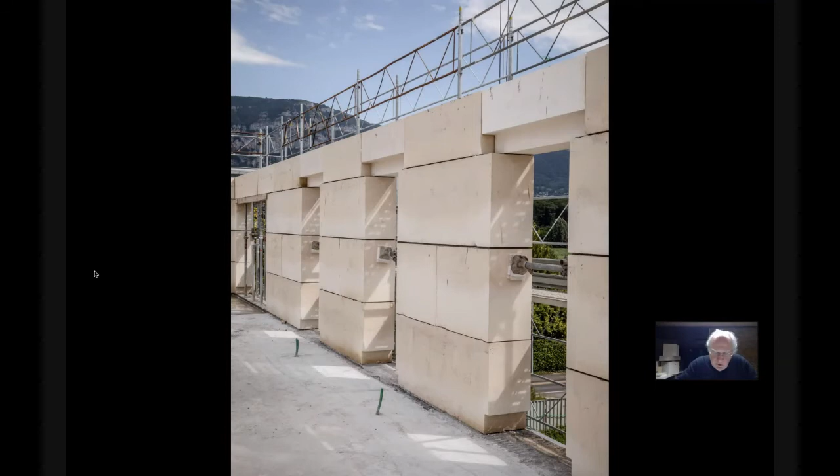The conclusion is that, regarding embodied energy, if we take stock over 60 years, which is a normal lifespan for a building, insulation or double glazing solutions only provide a marginal improvement compared to the embodied carbon balance sheet of solid stone construction. These studies should make us think about the sophisticated solutions that we recommend for our current buildings.

The debauchery of technology leads to the disappointments of expensive maintenance, whose obsolescence is less than the lifespan of buildings. Beyond these technical considerations, we must also understand that we are campaigning for an architecture which proposes to put man back at the center of architectural concerns. The architect must step aside in front of his work.

As stated in the introduction, we need to detach ourselves from the psychic dimensions of our creation, by allowing those who will live in our buildings to be able to invest psychically in their place of life. Man achieves happiness in his relationship to his place of life, without being prevented by architectural form resulting from a psychiatric attitude. This is essential if we want our profession to retain its social role. And I have found in stone construction an ally in achieving this goal.

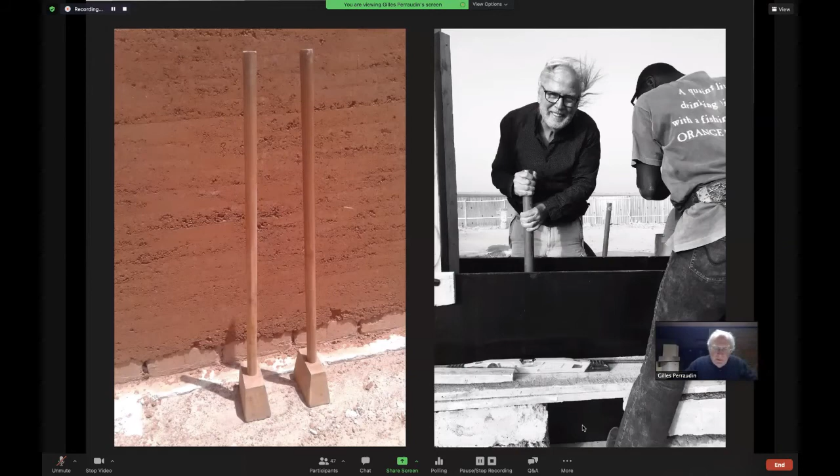Today, I am continuing my research in a country in West Africa, Senegal, entirely built in natural materials and with techniques excluding the use of construction machinery. We demonstrate that it is possible to achieve inevitable low carbon objectives. But this will be the subject of another conference, if you don't mind. Thank you for your attention.

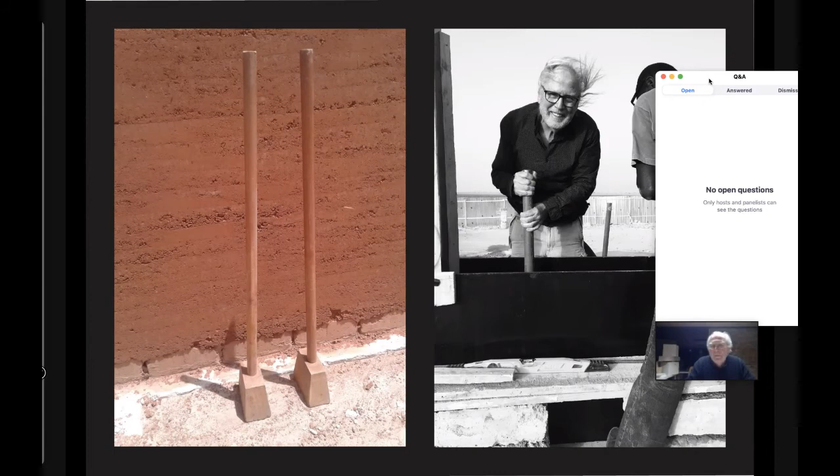I might start, Gilles. There's a question at the heart of the lecture, which is about failure and being able to learn from failure and move forward. And I enjoyed you talking about moments in your career where you were critical of yourself, of the high-tech work, and that you were able to then find a way to navigate from that, and it's not something that is talked about very often in practice, not publicly. And I'm just interested in, was that a painful process, or how was that process for you? How did that happen?

Sorry, it's difficult for me to understand.

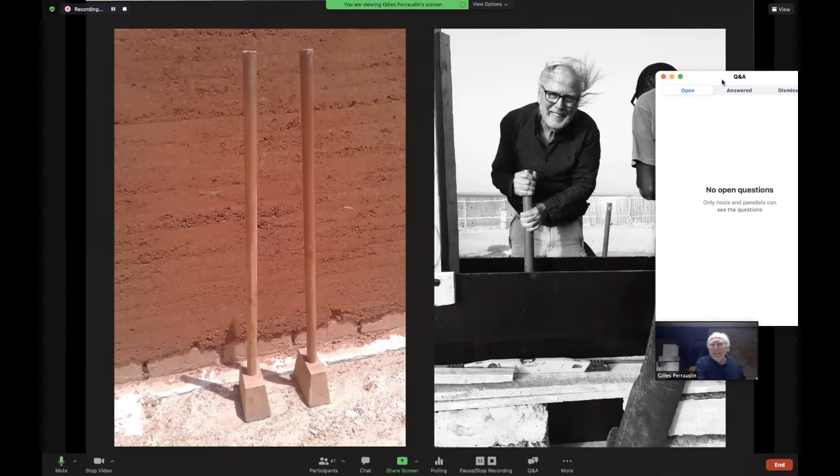Alors, peut-être, if there is somebody in the group here who speaks a little bit of French and maybe can help Gilles communicate, I will unmute you if you just let me know.

Because my French is... Désolé Gilles, mon français c'est terrible en fait. Just like my English. No, pas du tout.

I understand the global sense of the question, but I need perhaps a better translation to give you an answer. I understand that you have noticed that I transformed my approach after I made architecture with high technology, or something like high technology, and yes, it was. But at the beginning of my work, I did some construction in earth. Near Lyon, I did construction in earth.

It was just at the beginning of my work, and I was always attentive to the problem of the footprint of our work on the climate, and I think that it's an important question for us now. For me it is a permanent question I have about my work, about my working process, to be attentive to this question of energy. But it's not only about the question of energy, or finding the best way to build to maintain the climate on Earth, but also to redefine the position of an architect.